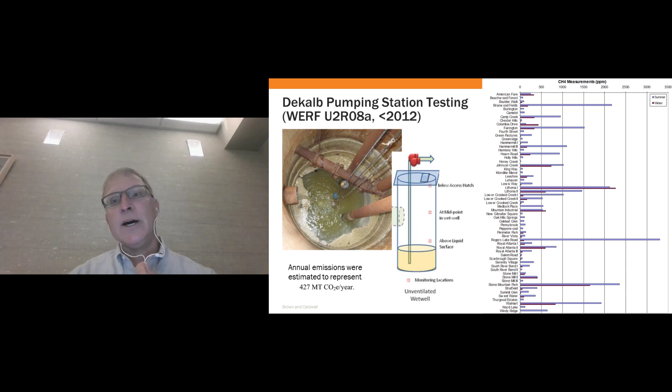There were summer emissions and winter emissions, so we ended up estimating what the greenhouse gas emissions were for the year. We ended up with a number that was 427 metric tons of carbon dioxide equivalent, which is not an enormous number. But when you think about all the methane we were certainly losing during this, and the fact that we weren't looking at any other manholes, this is probably underreporting of what the methane actually was.

The next example is some work we did under another water research project. In this one, we teamed with the NASA Ames lab, based in Sunnyvale or San Jose, California. We went to a plant, a large plant with a number of photosynthetic oxidation ponds, and what you're seeing is a number of EPA flux hoods in the facultative sludge lagoon A picture.

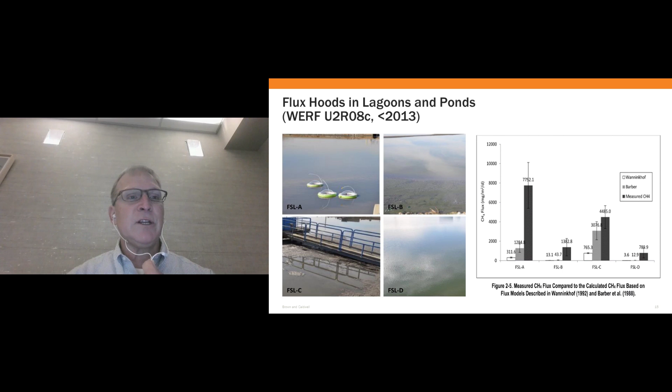So looking at the conclusions of this research, which I've copied in here, statistically we believe the average emission rate was 3.6 grams per square meter per day for the facultative sludge lagoons. Interestingly, that was only half of the emissions measured at the Sunnyvale photosynthetic oxidation ponds. So the lagoons, while they've got heavy sludge already digested, are producing about half the methane. Now, when you look at those ranges, they're big.

So for the facultative sludge lagoons, we were looking at less than 1 gram per square meter, up to almost 8 grams per square meter. So there was a big number there.

Now, what I'm showing on the right is the 20 lagoons at this water resource recovery facility. Each one of these lagoons is about 7 acres large, so they're very big. Yet we're hoping to interpolate from these 4 sampling points what the emissions are over this entire area. So the final conclusion in this summary is important because it says, we've done some basically grab sampling, and we really suggest that additional research be done in order to refine this estimate and to figure out a better idea on what's actually going on.

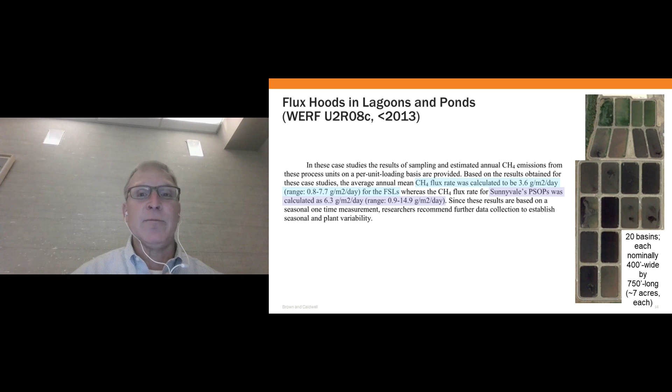So now I'm going to pivot here, and this is to DC Water's greenhouse gas inventory that we originally developed in 2009 for calendar years 2007 and 2008. I'd like to say I still think this is probably one of the most complete greenhouse gas inventories in our industry. I also want to acknowledge and thank a lot of folks at DC Water who made this possible.

Now, what DC Water wanted to do was to try and make their inventory as complete as possible. So that meant if we think methane or nitrous oxide is being produced by a process unit, let's measure it. Let's not just be beholden to methodologies and protocols that would allow us to take a good guess at what we're emitting. So instead, if they thought something was emitting methane, they would measure it.

So what I'm going to talk about now is all of the sources. This is just a quick screenshot here of the electricity emissions. It's on the left-hand side. And on the right-hand side, those are all the scope 3 emissions that we put in the greenhouse gas inventory.

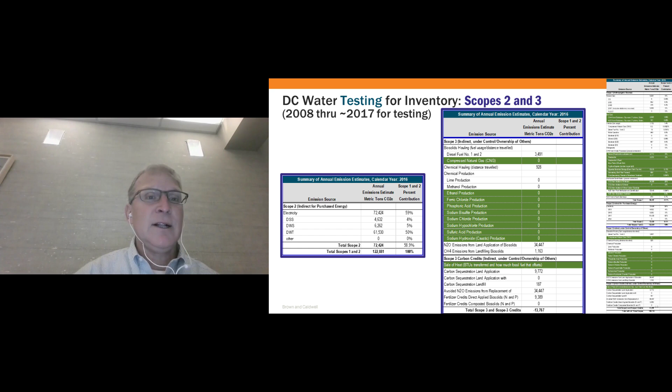So the next slide, these are all scope 1 emission sources. You're going to see there are some numbers here that were planned. We were envisioning, well, if they use ethanol in vehicles, then we'll include ethanol for vehicle fuel use here. But there are a number, in particular the methane emissions from the headworks, sludge dewatering, sewer methane, and digested biosolids storage and dewatering that are in this updated inventory.

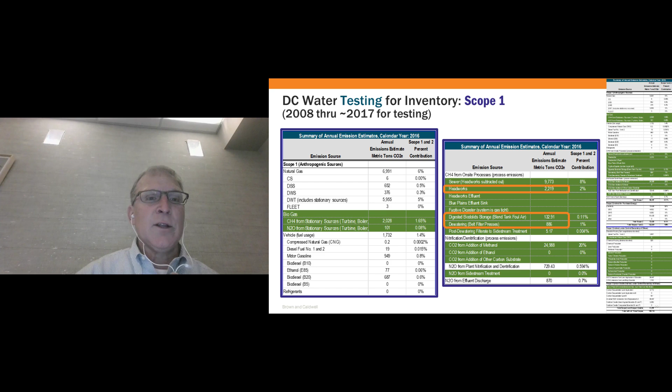Going to the next slide, I just highlighted the ones that we're going to talk about here today, which are the headworks and the dewatering.

And these are the storage tanks. They're lighted with sodium halide lighting, which is why the photos are so yellow. But what you're seeing is the ductwork on the roof collects the foul air from the storage tanks so that we could measure at a point that currently has a flow meter there. That's where we put our FID instrument to measure it.

And we only did about 4 hours of sampling in the winter and 4 hours of sampling in the summer, at different flow rates. What you're seeing here is that we had 2 different sets of data at 2 different digester feed flow rates, and we drew a straight line through it. Now, if you look at the methodologies for storage tank methane when we started this test, there's no methodology. So our bar that we were trying to exceed or do better than was, we know there's methane here. Can we measure enough that we can come up with a basis for a methodology that's a function of flow and how much flow is going through the digesters and coming out of the digesters? And so that's where we came up with the methodology and the curve that's there.

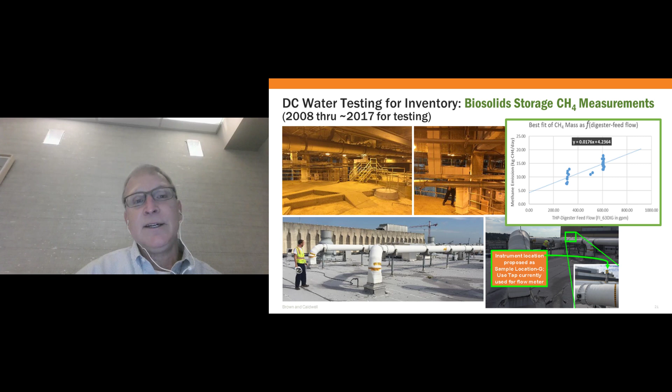The next slide shows what we did with sludge dewatering. We ran the dewatering over a 4-hour period at different flow rates, and we ended up with something that looks like a reasonable correlation. In particular, I'll call your attention, this particular straight line we forced through 0. The idea being that if I'm not sending any digested biosolids to dewatering, I would expect to get 0 emissions.

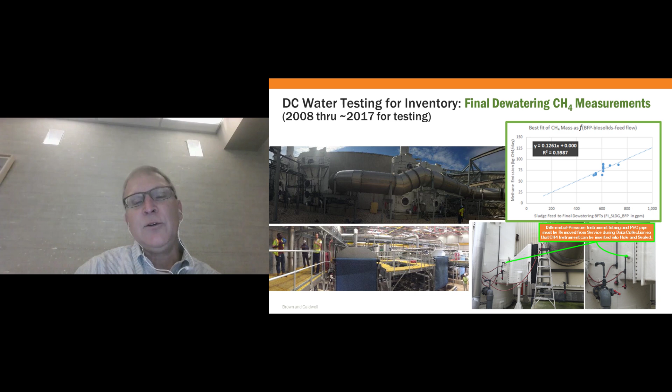The rest of the information on the background, those are in the bottom left, are all the covers for the belt filter presses for final dewatering. And then if you look at the foul air control unit, we would basically insert our FID instrument into ductwork that was going into the scrubber. So that's where we collected these data.

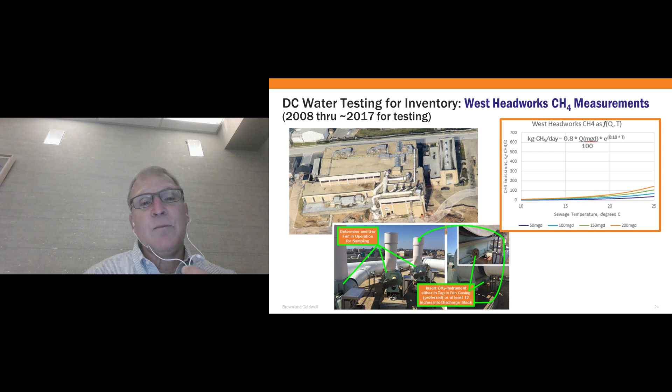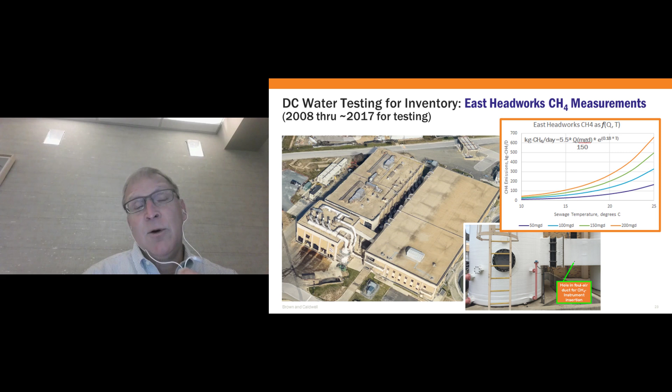But again, looking at the magnitude of these curves, per MGD and per temperature, when I look at these 2 curves, there's about 4 or 5 times more methane being released by the newer headworks per unit flow than with the older headworks.

Anyway, going on to the next piece, this was some brainstorming that we did at a workshop in Toronto. The question we were asking here is, where do you think we might look for methane? From a solids handling standpoint, there were lots of possible sources: fermenters, floating cover digester lids, pressure regulating valves, lagoons, dewatering, composting, buried biogas piping, RNG upgrading processes, side stream treatment processes, sludge and biosolid storage, odor control.

Now the next column has mostly liquid stream sources. The first one is potable water reservoirs, so that's not even on the wastewater side. Septic tanks are not part of centralized treatment, and yet we know they produce methane. There's also sewer overflows and the receiving water when we put COD into it, sewage collection systems, sewer pumping stations and vents, headworks, primary and secondary clarifiers, activated sludge tanks - in particular anaerobic selectors, but other places may be places where we're stripping methane out of solution - trickling filters, tertiary wetlands, and then COD discharges to receiving waters.

And this was recently added under the IPCC 2019 update. So I guess the takeaway here is, if you have any of these process units at your wastewater plant - and almost everybody has at least one of these, if not half of them - then you might want to do some testing to see how much methane your process units produce.

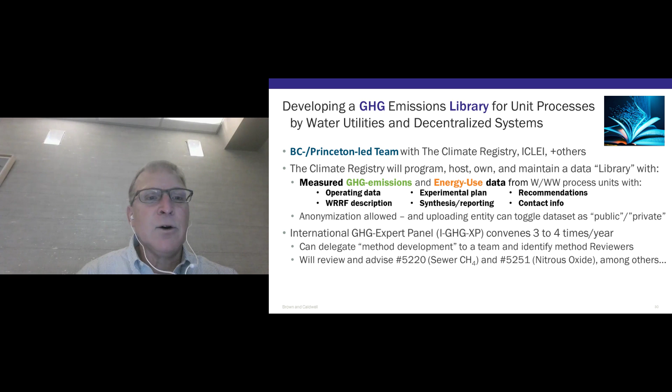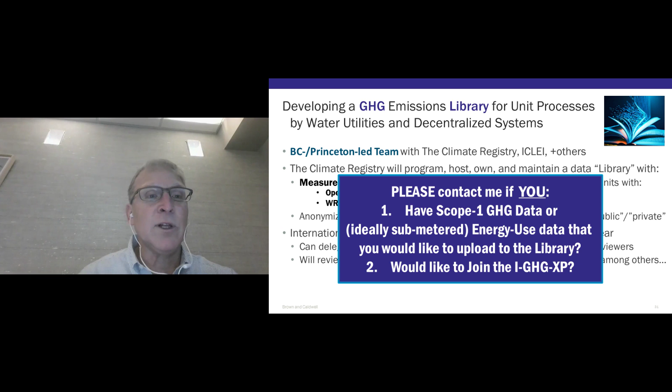And when we get enough critical mass on, say, headworks methane or anaerobic selector methane, then we would turn a group of volunteers from our expert international panel onto it to try and develop a methodology that everybody else could use. So with that, the last note here basically just says, call me if you have Scope 1 data you'd like to put in this library. And if you'd like to be part of our international greenhouse gas expert panel, call me as well - we'll include anybody who wants to be in those calls, expected to happen either 3 or 4 times a year. So with that, I'm going to hand it off to Adrian Romero with Jacobs.

Thank you, John. Appreciate that. Good afternoon, good day everyone. My name is Adrian Romero with Jacobs Engineering. Today I'll be talking about direct measurements of methane. I'll provide you with some context of what we're doing as an industry for direct measurements of methane at wastewater treatment plants, some concepts and definitions there, and also walk you through some of the methodologies and approaches we're using as an industry to monitor methane at our facilities, understanding that we're still developing in the field, bringing lessons learned from the oil and gas industry, from landfill, merging it also with the experience we have monitoring odor control.

It's air emissions, odor control, but now bringing that experience into the methane space and merging it with the new approaches that I'm going to be talking about. John shared very great information about past experiences using different methodologies, but also the different sources that we can have in our facilities. So what we're going to present on the methods are how we can bring those to monitor the different sources and the plan as a whole.

So with that, let me start talking about methane monitoring, and starting with what is the intention of monitoring. We can split this into two: first is quantification, and on the other side, source identification. They can work well together, right? Where we're focusing here in this webcast is talking about quantification and getting to that mass emission.

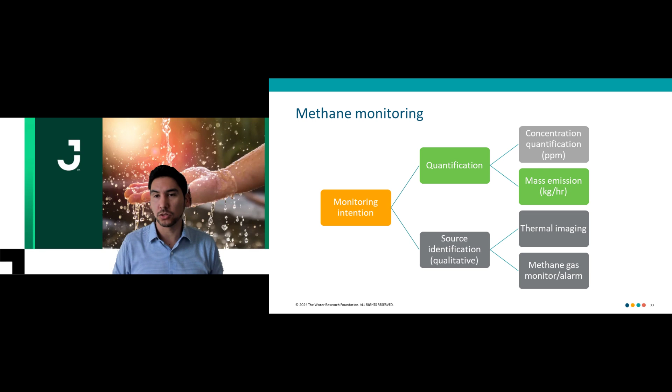In terms of mass per time, John talked about kilograms per day, or we talk about tons of CO2 equivalent per year. Here, mostly we're going to be talking about kilograms per hour, but at the end, it's mass per time. We also can quantify in terms of concentration, knowing that the concentration will need to have that airflow rate in order to come out with that mass emission.

So let's keep moving here. Some definitions and differentiations about some of these concepts: quantification methods for methane at our facilities. We can talk about the site level, the facility as a whole, and source level. The site level is going to help us determine as a facility how much we're emitting and then keep track of our progress. But we also need the source level in order to get to the granularity needed to develop a mitigation strategy. So we need both to be able to mitigate and then continue to make progress.

We also have quantification methods that can be continuous or intermittent. Continuous will help us determine what are the seasonal variations, or if there are any variations in terms of operational changes. John alluded to some of those in that DC water example as well. However, intermittent measurements, some of the methods that we have available, can support the prioritization of the mitigation strategy and the sources that we're going to get to.

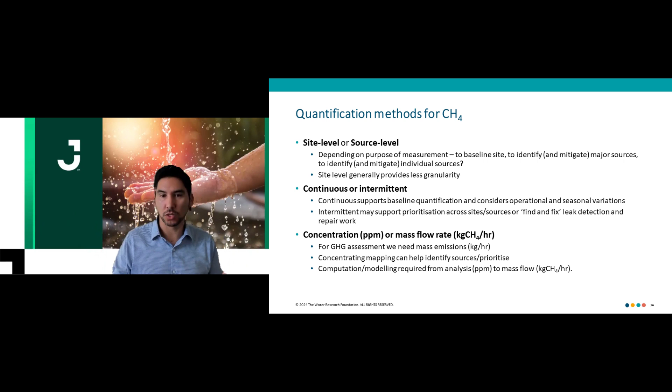I want to also make a reference to the fact that some of the emissions that we find in our wastewater treatment plants can be continuous and it can be intermittent as well. So if we have an intermittent source, we would like to have a continuous, ideally, monitoring so we can capture those events as an example. And then we have those quantification methods in terms of concentration and mass flow rate that I already mentioned in the last slide.

So what are the current approaches that we have? I'm going to be talking about some of these in the next slide in terms of tracer correlation, mass balance methods, and such. But we have the classification in terms of plant-wide or the site level, and the process unit direct measurements when we're trying to target the source quantification, source level.

So we'll go over some of these from the site level perspective. We'll talk about tracer correlation, inverse modeling, differential absorption LiDAR, continuous gas sensing, and drone flux method. They all will have different outputs, but the goal is the same: try to get to that mass emission rate of methane.

Let's make sure I got this one. So starting with the tracer correlation, it's a plant level intermittent method. It is recognized as the most accurate of intermittent methods. It's based on a controlled release of a tracer gas nearby the source. The source can be the full facility, or it can be a tank or a vent. A known mass of a tracer gas, and then the monitoring of both the tracer gas and the methane at a certain distance, and use that ratio of the tracer gas with methane to determine the actual mass emission of methane.

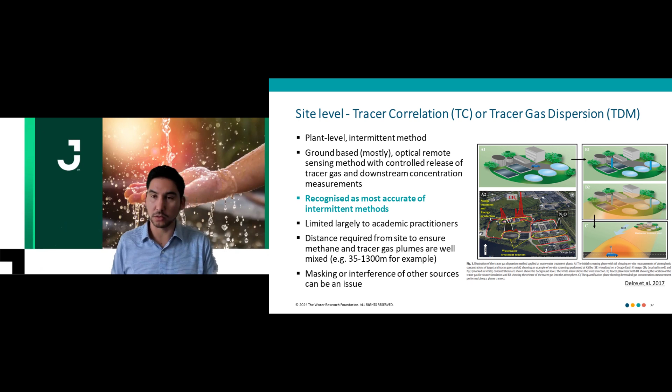It's limited largely to academic practitioners because of what it's involved to do it. But again, as with anything, there is a technology or methodology development first in the academic area, and then we start implementing it in our practice. Masking or interference of other sources can be an issue with this method, but again, it's recognized as one of the most accurate for intermittent method.

The reverse dispersion modeling — this is something that some vendors out there have implemented for odor control, monitoring odors of our facilities.

It's a plant level method, based on concentration measurements. But then we bring our dispersion modeling experience to track all the way back to the source of those measurements, using it from the perspective of the plant as a whole first. We need a sensor that can monitor methane concentration, combined with weather data, temperature, and pressure, so we can do that reverse modeling.

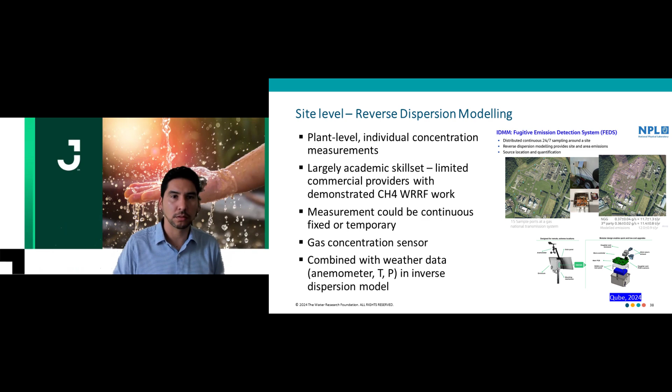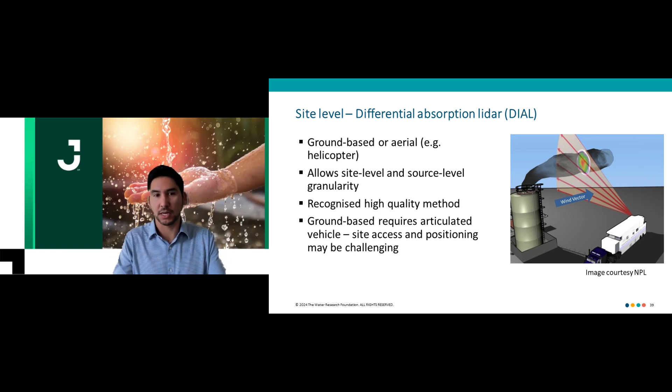It does require an articulated vehicle, meaning we can move around the plant and determine the mass emission rate for methane at the site level. It can also get into some of the different sources, but it's limited by the physical limitations of getting to the source with the vehicle.

Then we have unmanned aerial vehicles, the drone flux wall. Chung is going to talk a bit on this in his example in a few minutes. It's intermittent, and it can support source level as well. This is great for site level, but also can support source level. Basically, this is a drone that already has sensors for methane, weather, air velocity, and air direction, and it goes around creating this wall of the different methane fluxes, creating a cool graphic to get the overall site level concentrations.

The drone can also move through different sources, so that's an advantage. Some of the limitations are that we cannot fly drones everywhere — if there's an airport nearby, there might be some limitations to implementing this method.

Continuous gas sensing LiDAR, similar to what I spoke about before, however it's a different technology based on laser. It combines tunable diode laser with differential absorption LiDAR and photon counting, just to sound fancy. It looks very fancy, sounds fancy. It's very accurate, commercially available, and it allows for that site level.

We have a couple of options: mounting it in a vehicle or putting it on a mast, and then having up to a 200 meter radius that we can scan for methane emissions. It's impacted by wind, like most of the methods we're talking about here, and it continues to be challenging when it comes to diffuse sources.

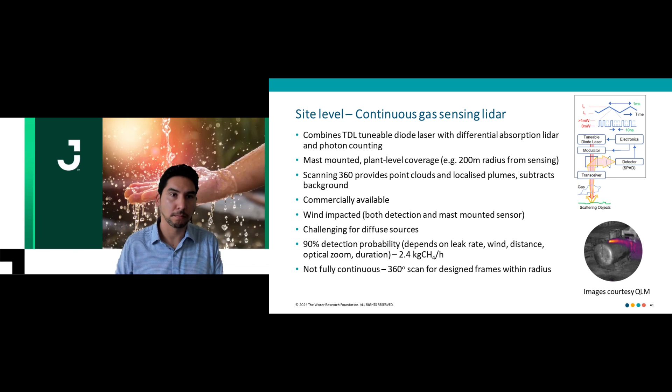If we have that 360 scanning I was mentioning, it can again be continuous or non-continuous, depending on the rate of scanning that we have. Again, another method available for site level. Another site level method that's coming up — we're learning more how to implement it — and there are great examples that have already been implemented for major sources.

This is satellites, using satellite imagery to determine methane emissions. It's great for site levels, and it's relying on the accuracy of the quantification. Right now, some of the satellites and algorithms available can get to around 100 kilograms per hour, which is above most facilities, but there are some facilities out there. So it will be great for site level.

If we want to get to the source level, that will be more challenging. However, there is some work out there with artificial intelligence also pushing to get to a lower detection limit. So it would be great to have that capability in the near future.

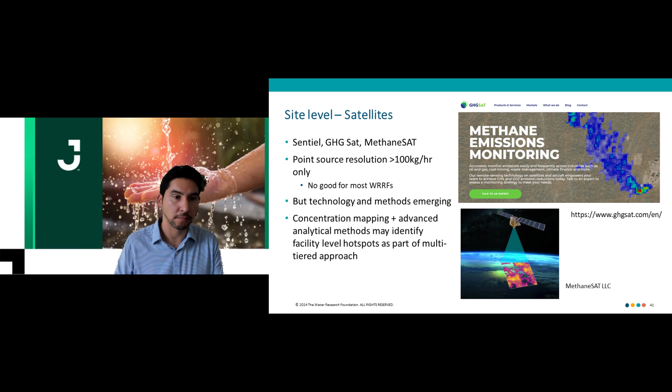Moving to the source level, we have optical gas imaging cameras, basically using thermal camera technology to detect and quantify. Some cameras can quantify, not all of them, but there are some cameras overall that can help us detect methane and see what the main sources are, and then use that quantification capability that some of them have. An advantage is that we can cover sources that are difficult or unsafe to reach, and still be able to quantify.

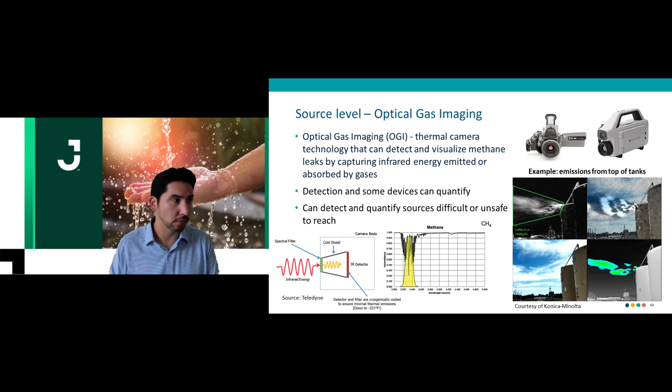Our last one in terms of source level is the flux chamber, which we've used in odor control for a long time for aeration basins, tanks, any area source. Advantages are we can measure other gases such as N2O, and it does rely on that analyzer in the back end. The flux chamber helps control emissions and understand airflow, but we still need to monitor and measure methane, so it relies on the sensor or analyzer in the back end.

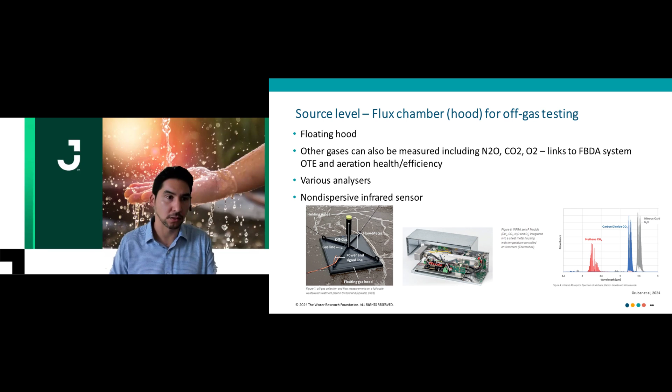Bringing it all together, we can start looking at these methods from the spatial scale and the temporal scale. Spatial scale is when we talk about top-down versus bottom-up approaches. Top-down includes satellites moving down to aircraft sampling, towers with installed sensors, and vehicles with mounted equipment driving around the facility, all the way to individual sources using direct measurements of methane from the source. There's also continuous versus intermittent measurements.

Key considerations: there are some standard methods for these approaches, mainly developed for the oil and gas industry, that we're trying to bring into our industry. They're still not specific for water resource recovery facilities. There are specific guidelines being developed in the UK and in North America. John mentioned some of those projects moving toward that, so we continue to work on that as an industry.

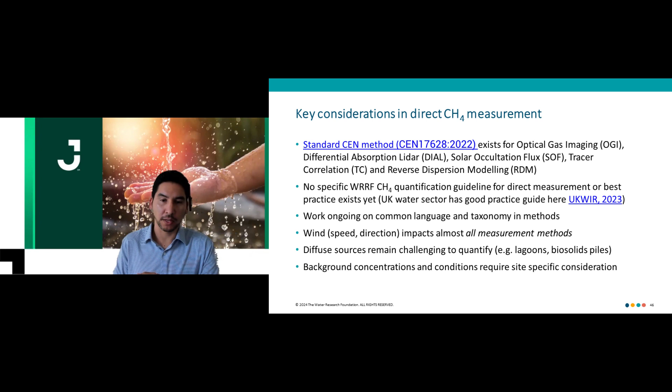Another key consideration is that most of these methods are impacted by wind and weather characteristics—some more than others. Background concentration and other conditions can also affect this monitoring.

My last point is that these solutions remain a large improvement for water resource recovery facilities. We continue to implement and learn, finding which methods work better, understanding that site-specific conditions play a role. Site-level measurements can provide a very accurate picture of emissions as a whole, but they're not as accurate for source-level quantification, and the opposite is true for source-level measurements.

If I want you to take one thing from these 15 minutes, it's this: we have all these tools in our toolbox that we continue to implement and transfer to our industry. But so far, as with other industries, multiple methods are required—there isn't a single method that can give us both plant-wide and source-level quantification. With that, I'll hand it over to Trung so he can talk through some examples. Thank you.

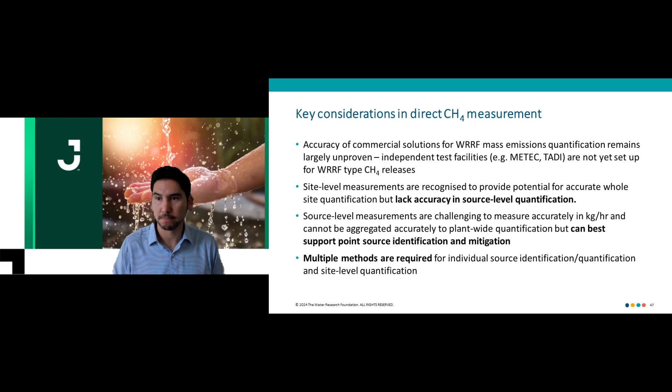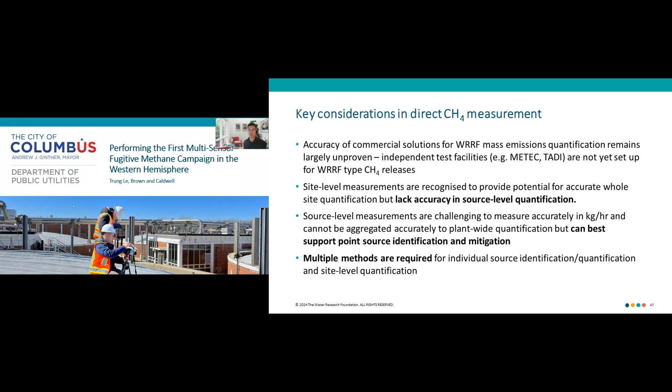Thank you, Adrian. Adrian and John gave some good context for what we're going to talk about next, which is a case study in which the city of Columbus performed the first multi-sensor fugitive methane campaign in the Western Hemisphere on a commercial scale.

The city of Columbus has two treatment plants. The one we're focused on is the Southerly Wastewater Treatment Plant, about 300 acres, with an average flow of about 115 MGD and a 440 peak flow. They have a two-stage digestion system with a Class B liquid and cake end-use program. To the right is the layout of their facility, and below is the solids treatment process system, with acid phase digesters and methane phase digesters where biogas is sent to flares.

They're currently not using the biogas in boilers due to its quality. The digestate system is split into thickening centrifuges and dewatering centrifuges, with a liquid storage tank that has capacity for 6 to 9 months before liquid land application, and biosolids cake storage for about 2 to 3 days before land application.

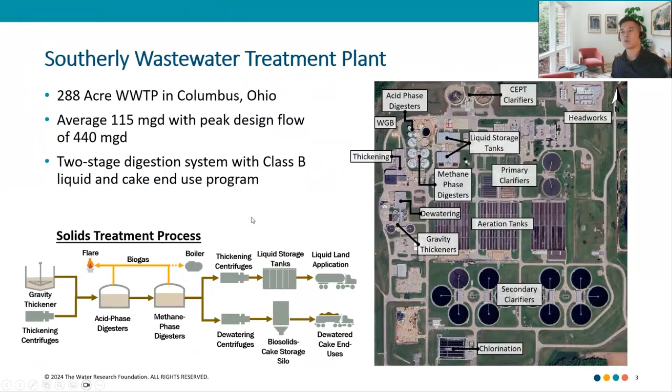Their program is currently looking to expand into a new program, partly predicated on their climate action plan. Like many other facilities, they were looking to meet climate action goals—a 45% reduction by 2030 and about 100% reduction by 2050. With that goal in mind, along with the needs of the program, they wanted to initiate a new bioenergy program.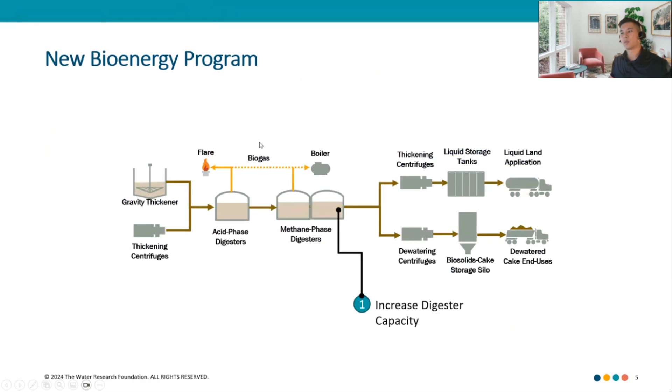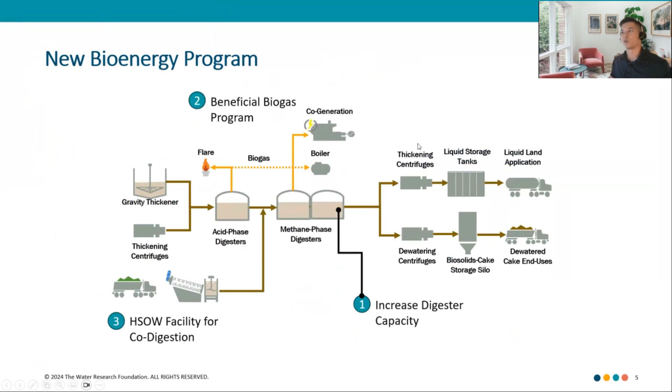That bioenergy program was partly looking to increase digestion capacity and beneficially use biogas at their site through co-digestion. It was also meant to produce more biogas to generate electricity, reducing their scope 2 emissions. One of the neat things about the project was that IRA funding was available, and it's something that we walked them through.

Bids are supposed to be coming out pretty soon, in which up to 50% of the program was going to be covered through direct pay.

Understanding their current climate action plan, one of the things we had seen during planning—and this was some stuff John Willis had worked on—was that there were indications of some major fugitive methane emissions that didn't align with their climate action plan or their goal to beneficially use biogas. One of those indications is shown here to the left.

The figure at the bottom shows blue as the solids, the thickened sludge going into their liquid land application tanks, and orange as what's going out. So what they were seeing was potentially residual digestion occurring over that 6 to 9 month period, roughly about 26 to 30% additional VSR.

We weren't certain at the time whether it was anaerobic or aerobic conditions. If you assumed all that was anaerobic, roughly about 105 kilograms of methane per hour would have been emitted from their liquid storage tanks, essentially doubling their emissions from their scope 2 energy use.

The other parameter at the plant during the planning stage was that they have 6 digesters. 5 of the digesters had floating covers, and as many of you know, floating covers are potential sources of methane leaks. They also had one fixed cover.

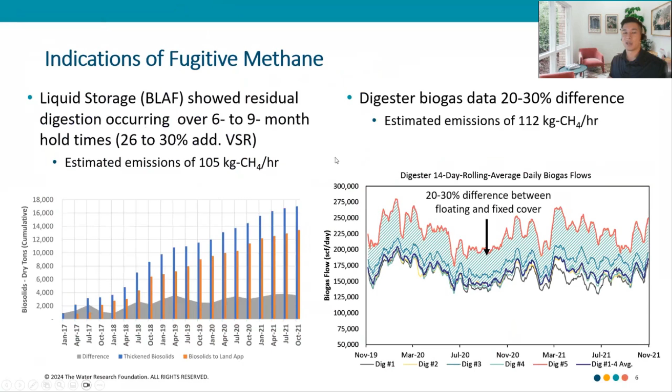What they saw was essentially a 20% to 30% differential between the biogas meters between the two systems, which we believe was potentially leaking out of the system from the covers. It was estimated roughly 112 kilograms of methane per hour would have been leaking from the floating covers, again roughly doubling the scope 2 emissions at their plant from electricity use.

So based on those considerations, to align with their bioenergy program goals and their climate action plan, the city reached out to ask for help developing a fugitive methane campaign, to understand where the emissions were coming from and then establish a mitigation program.

One of the first things we had to do was look at all potential sources. Many of these were covered by either John or Adrian, but some unique factors of the plant were that big liquid storage program—a lot of that headspace air is actually sent to a series of odor control units. All the thickening and dewatering process air goes to a bunch of biofilters. They also have a cake loading facility, and a lot of different appurtenances at the facility that were reaching older stages of life.

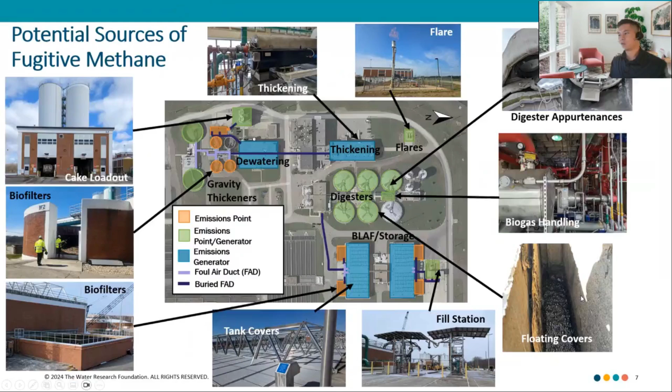And of course, the floating cover, as you can see in the bottom right, was a big potential source of leaks based on the video feed we could see, the bubbling of the gas through the solids. So keeping all those factors in mind, we had to develop a measurement campaign.

Adrian covered it broadly. It was really a composite of two frameworks, the bottom-up framework and the top-down. Bottom-up really gives a different level of assessment—essentially you're looking at each individual source emission and trying to get a quantification for individual components. The challenge is, while it has great localization of emission sources, it's really not the best for quantification, because you often miss sources of emissions, especially if the detection limits of the equipment you use are higher than the emission sources.

So the way we approached that is we used optical gas imaging, which Adrian mentioned earlier. We'll talk a bit more in detail about that in a second, but we used OGI to do source and leak detection. It's really the bread and butter of leak detection within the oil and gas industry.

Along with that, we used FIDs and different discrete sampling methods to really check our top-down method. Top-down methods have a bit of a different spatial and temporal scale—the method we use is this flux wall method, by a company called Explicit, that Adrian has spoken about a little. The great thing about top-down methods is they're generally much more accurate on quantification, but they can struggle on localizing the source emissions from the site.

So just to get a bit more into OGI: it's a really sensitive IR type of technology, essentially an image spectrometer. Every greenhouse gas essentially has a different fingerprint, and that fingerprint changes on the infrared scale—each greenhouse gas has a unique signature.

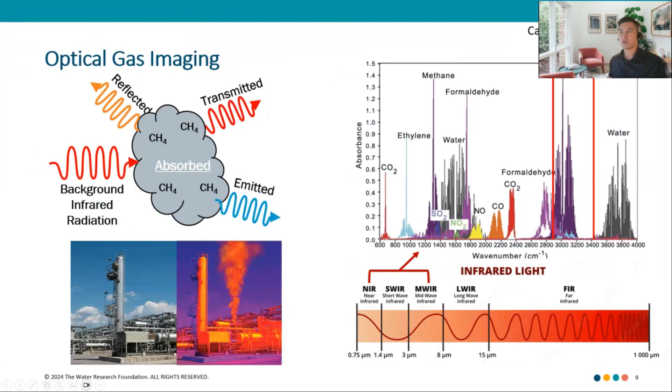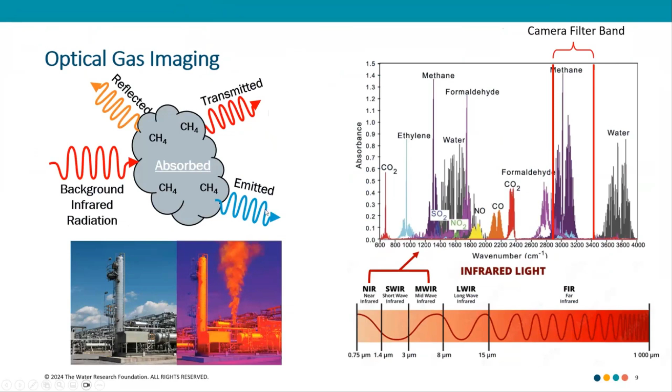As background radiation goes through a greenhouse gas, it changes the energy and adapts it to the scale or bandwidth that is localized on the IR spectrum. These type of cameras are unique because they have the ability to screen that discrete level of bandwidth, and what was once invisible can then be visualized through a thermographic image through OGI.

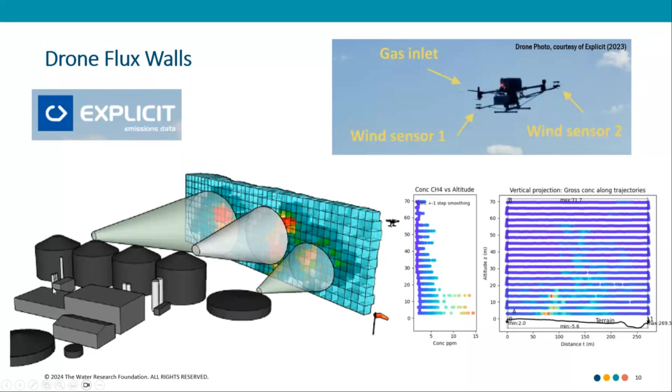Drone flux - Adrian covered a lot of this, so I'll shorten it, but it's interesting because it's not dependent on dispersion models. The technology allows you to run vertical flux walls where you sample roughly several hundred points, giving good detail on the plume distribution and profile, providing a great means for mass emissions quantification. It's a mass balance method - you identify an area and run scans upwind of the plume and downwind of the plume, then deduct the two.

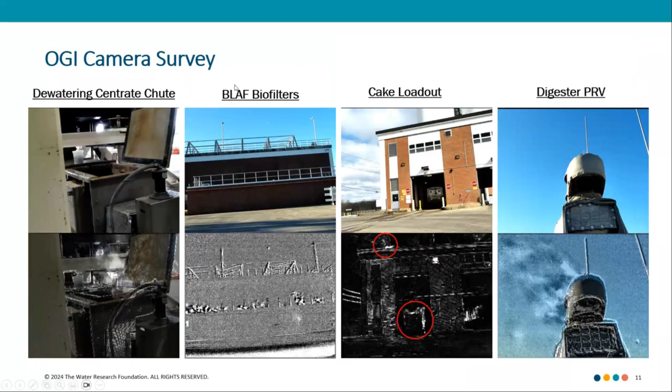We're going to run through some results from the surveys we were doing. This is only a couple of the surveys due to time restrictions, but what you can see here is dewatering. It's been known that dewatering is a source of emissions, especially some of the work John has done in the past. On the top is the visual image and the bottom is the thermographic image, and the clustering of white colors that look like plumes is essentially the methane plume.

This is from the dewatering chute. The black is the liquid storage tank. All that air from the headspace is sent to the biofilters. I know there's a question about whether biofilters do any biological oxidation, and we can answer that in the chat, but essentially for Columbus, it didn't really do much for methane reduction.

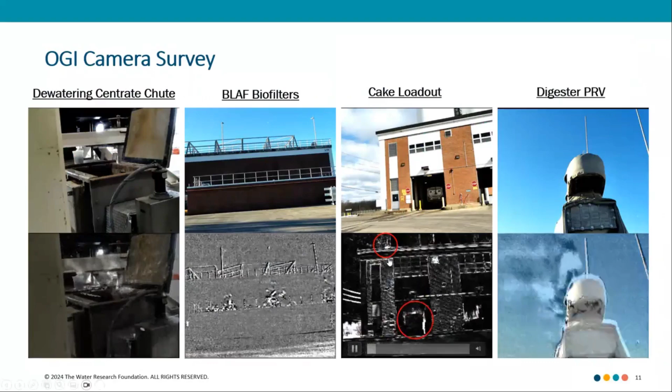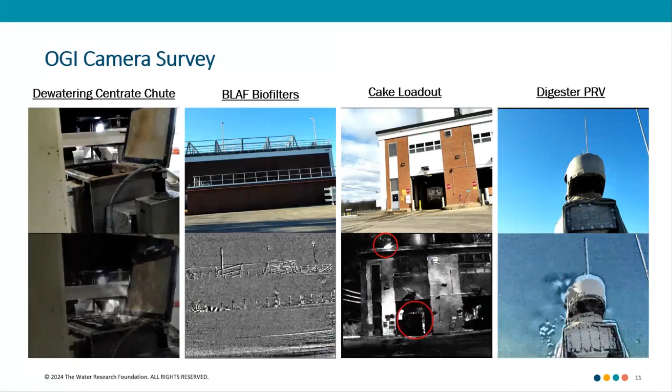What you see in the third image is the cake loadout facility. As the cake was loading onto the truck, emissions were distributed out of the tank, out of the trucks, and then out of the vent shown there. Lastly, digester PRVs - these are quite a common leak source. We won't cover it in depth today, but many issues result from the design of the pressure set point for digester PRVs, and the operating pressure leads to more continuous emissions than you'd expect from those type of safety devices.

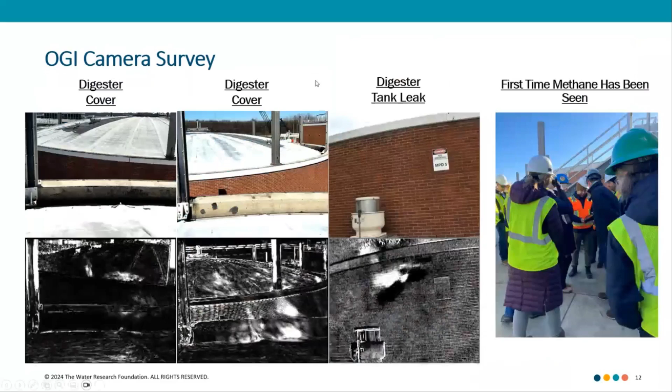The city of Columbus actually invited the local EPA out, and you're seeing here the staff on site looking at the data live through the footage we were conducting. Really interesting material. We did do quantification as part of it, but its primary purpose was to identify leaks so we can develop good granularity on the locations of emissions for mitigation purposes.

I want to note that the drone method, like Adrian mentioned, is an intermittent type of sampling method. This is a snapshot in time.

So there's a question about how often do you need to run drone flux to do really good quantification or representative quantification of the year. That's still science being developed, but we have a generally good idea of when to run it. Typically summer and winter operations tend to be representative of the year.

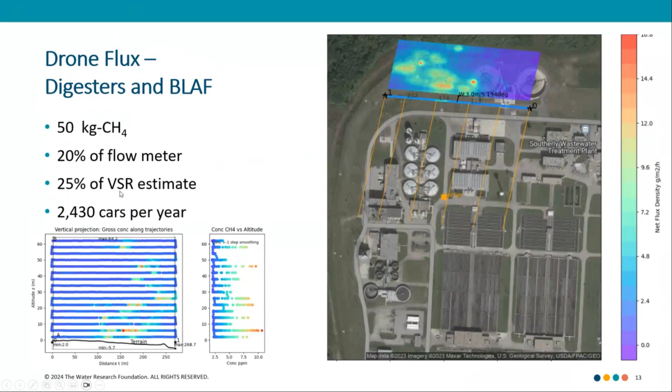Relative to the data shown prior, it was only about 20% of the flow meter data for the digesters, and about 25% of the VSR estimate for the BLAF on the residual digestion. I think one of the things that was clear from that was that perhaps not all the anaerobic conditions were there for digestion within the BLAF.

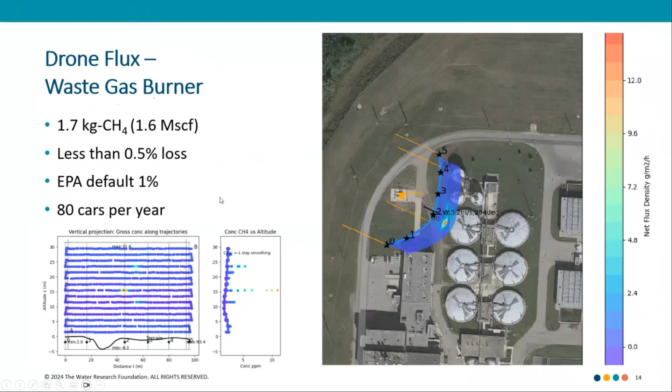We also ran a waste gas burner efficiency test here. This was interesting because the efficiency of the waste gas burner was actually really good, about only 0.5% slippage. The EPA has a general default of about 1%. I think one of the reasons the waste gas burner performed so well was because it was essentially flaring all the gas at the plant, so it was a pretty continuous amount of gas flow to the flare.

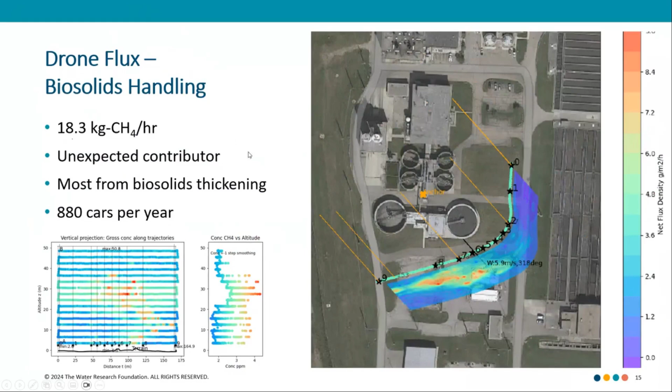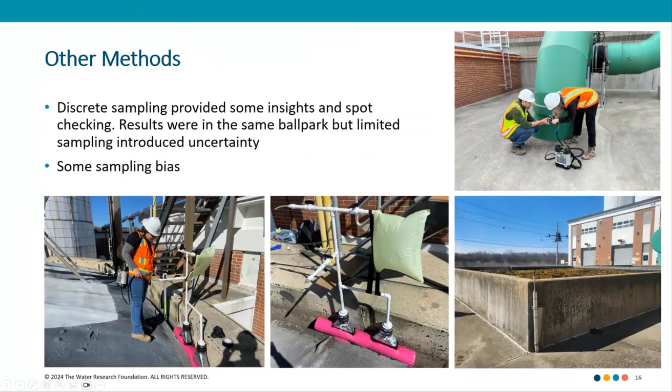I mentioned other methods - we did do that discrete sampling. They were in the ballpark. We had not intended them to be the primary source of quantification for this type of campaign, primarily due to the cost of labor associated with it. There was also some sampling bias due to the access and available areas we could sample, but we're showing some of the FID work on the odor control. We did some general bag mass flux methods there as well.

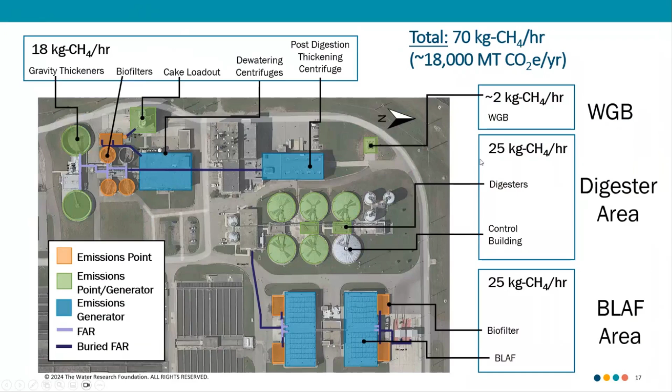So in general, the outcomes showed roughly about 70 kilograms of methane per hour, roughly about 18,000 metric tons of CO2 equivalent per year. You can see the breakdown here from the different areas. Most of the emissions came from the digesters and the BLAF, and a little less than a third came from the solids handling areas.

So what I want to show here at the end - sorry, we actually have a couple more slides. What I want to show here is this figure, which is really interesting because Columbus was moving towards a bioenergy program predicated around co-generation and co-digestion. This figure essentially shows greenhouse gas reduction and methane leakage, and I think for this you can just focus on the X axis here. What is shown is different electricity production based on the source of fuel - coal, oil, and natural gas.

Where we're at with the campaign was roughly about 15% of the biogas production was being emitted or leaked from the site, which was roughly equivalent to oil. This was not something the city of Columbus desired or wanted at all, but there is a bit of a reality here. What you also see is the plant data represented about 40% of the total biogas production, and what we think it really is is between 15 and 40%. Really, any number for the city of Columbus is not something they wanted to have.

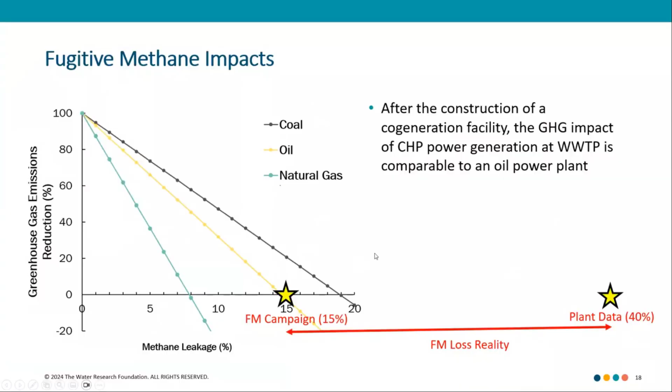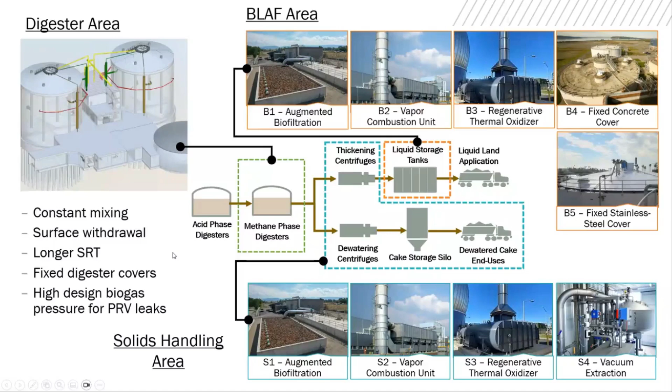I'm not going to jump into depth on this because there are other calls later that are going to cover some of this. This really gave a great baseline for us to understand their greenhouse gas emissions, the localization, the granularity, and the potential changes. We performed a really comprehensive mitigation analysis that investigated all the different locations and areas where we could mitigate emissions, and looked at a universe of different technologies, methods, and means. The great thing is we were able to get to a bunch of solutions that allowed the city of Columbus to roll it into their bioenergy program as we were designing it.

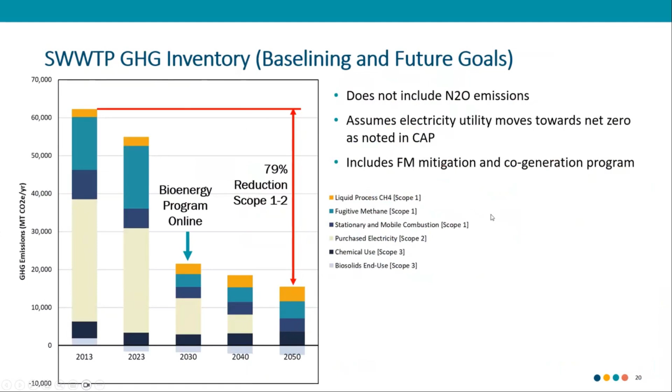So this slide is showing the baseline of 2013, and by 2050 it's shifting to a significant reduction through all the different solutions implemented, roughly about 80% reduction in scope 1 and 2 emissions. This does include the utility moving towards net zero. It does not include N2O - that's the next project we're working on with them. But it was really great because a lot of the quantification and measurement efforts led to feasible mitigation solutions for the city of Columbus.

So I do want to end here with one concept, because I think Adrian and John covered it. This is an evolving science. David Ponder often tells me: don't let perfection get in the way of progress. There are a lot of really great methods and means out there. Even the oil and gas sector hasn't gotten to the point where they're super confident in the means and methods for quantification quite yet. It requires a composite of bottom-up and top-down solutions to get the level of detail you need. And even if you're not looking to do high levels of quantification with high accuracy, things like OGI, discrete sampling, or using a sniffer to investigate your site is a really important thing to do that could be done now to reduce methane emissions.

So that was the end of my talk.